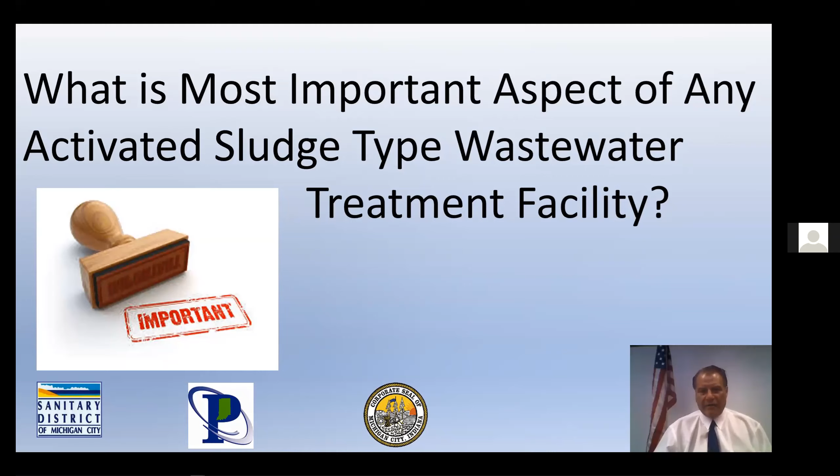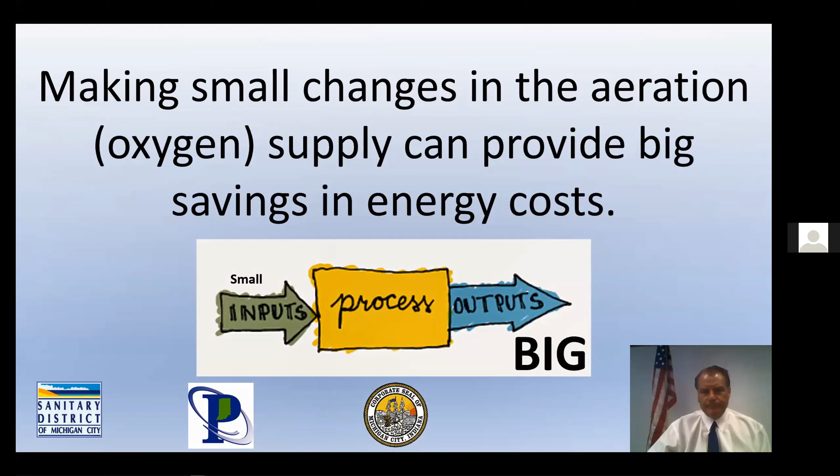But first we must ask, what is the most important aspect of any activated sludge type facility? Proper and adequate aeration. Making small changes in the aeration supply can provide big savings in energy costs and huge reductions in pollution.

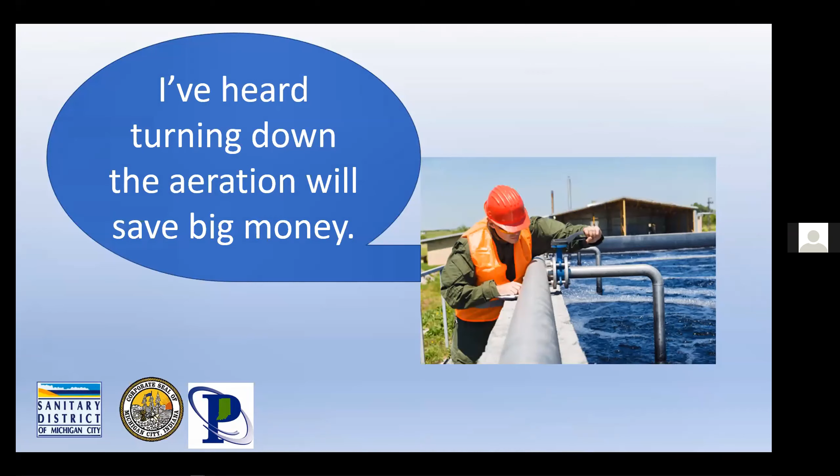Is this a simple, straightforward process? I've heard turning down the aeration will save big money. So I turned it down, way down. I should start seeing savings soon. After I save all this money, maybe I'll get a raise.

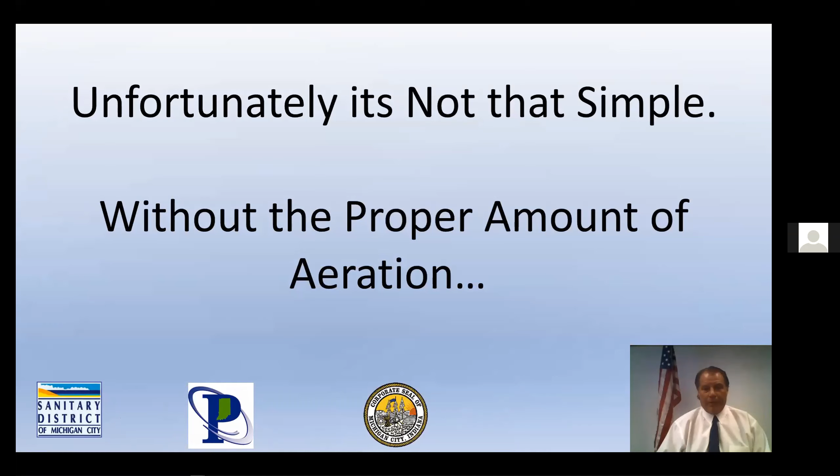Unfortunately, it's not that simple. Without the proper amount of aeration, this is Mr. Big. Mr. Collins often talks about Mr. Big when he gives his presentations at the Pollution Prevention Conference each year. And as Mr. Collins will remind you, Mr. Big will not be happy with you if you turn down the air too much in your aeration tanks.

You will be receiving a call from Mr. Big, and he will be saying to you, 'Hey, Michael, what do you know about these permit limit violations?' I don't think anyone wants to receive that call from Mr. Big.

And without the proper aeration, the overall objective of treating the wastewater will be compromised, polluted water will be discharged to the receiving stream, and violations of the environmental rules will occur. And you can be rest assured, Mr. Big will be on the other end of the phone.

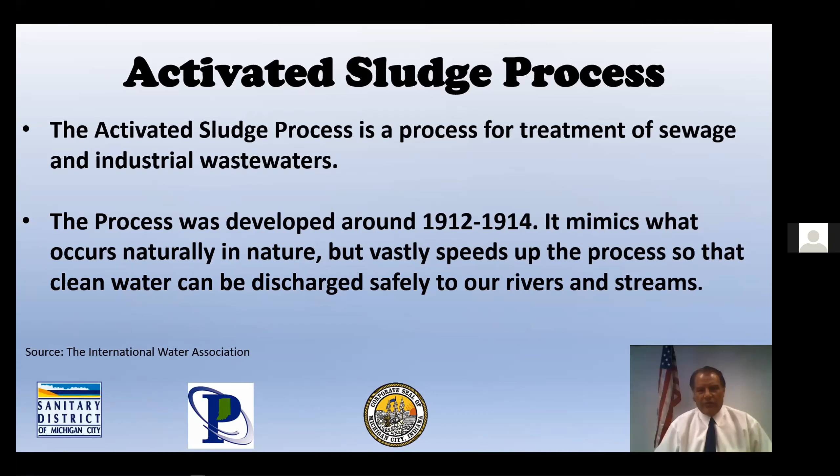Let's spend a little time to talk about the activated sludge process. The activated sludge process is a process for treating sewage and industrial wastewaters. The process was developed around 1912 to 1914. It mimics what occurs naturally in nature, but vastly speeds up the process so that clean water can be discharged safely to our rivers and streams.

There are a large variety of designs. However, in principle, all activated sludge systems consist of three main components: an aeration tank, which serves as a bioreactor; a settling tank or clarifier for separation of the activated sludge solids and the treated wastewater; and return activated sludge equipment to transfer settled activated sludge from the clarifier back to the influent of the aeration tank.

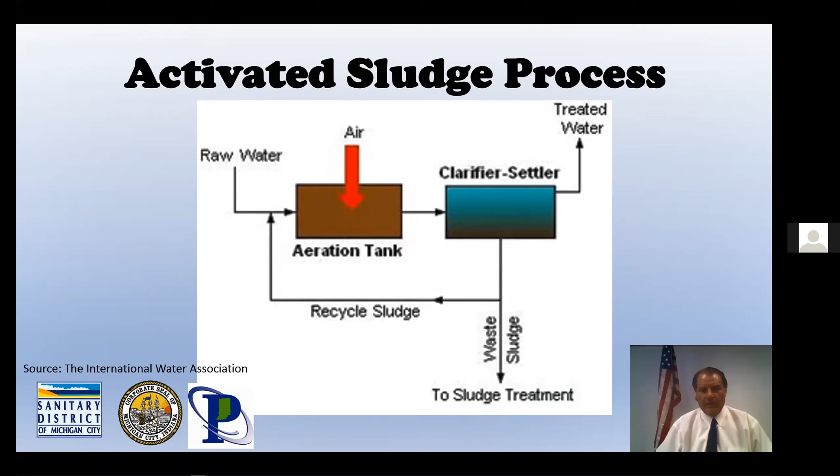The biomass mixture in the aeration tanks is commonly known as mixed liquor. Typically, the solids range between 2,500 and 6,000 milligrams per liter in these tanks, and you want to maintain a dissolved oxygen level of at least 1 to 2 milligrams per liter at the end of the tank to achieve adequate treatment.

Efficiency is controlled by your detention time in the tank and other factors like your loading of BOD and nitrogen. That's called your food to mass ratio, or food to microorganism ratio. And of course, your oxygen supply.

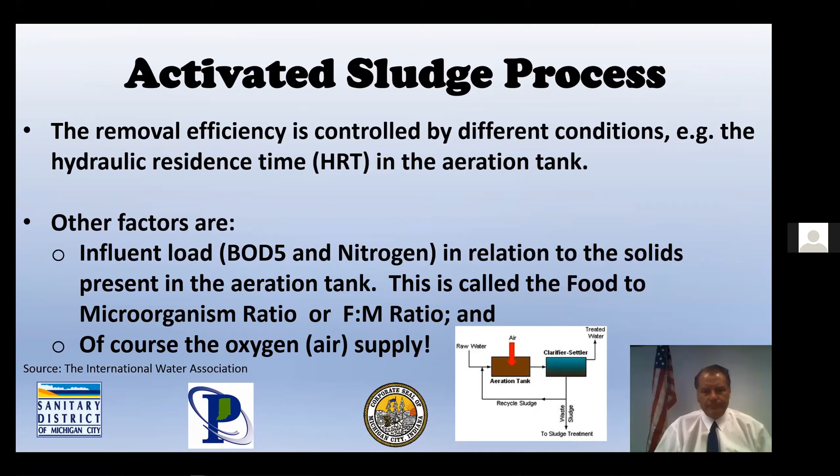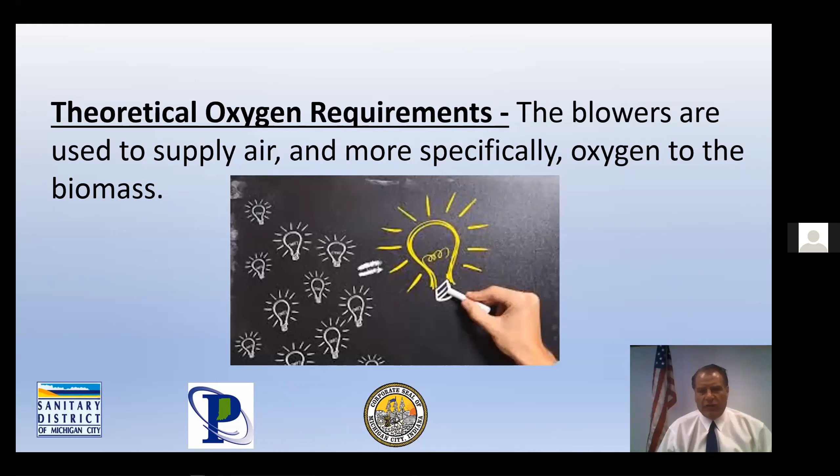But how much air is needed to treat the wastewater? Let's take a look at the theoretical oxygen requirements. The blowers are used to supply air, but more specifically oxygen, to the biomass. The theoretical amount of oxygen required can be calculated using the flow, BOD, and ammonia loadings.

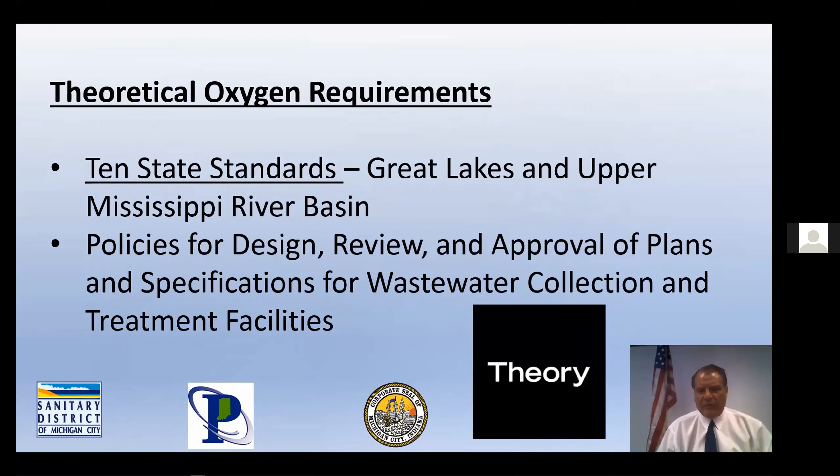The theoretical oxygen requirements are contained in the 10 state standards. It's a policy for design, review, and approval of plans and specifications for wastewater collection and treatment facilities.

The theoretical oxygen requirements are contained in section 92.331, and they state that 1.1 pounds of oxygen are needed for every pound of BOD treated, and 4.6 pounds of oxygen are needed for every pound of ammonia treated.

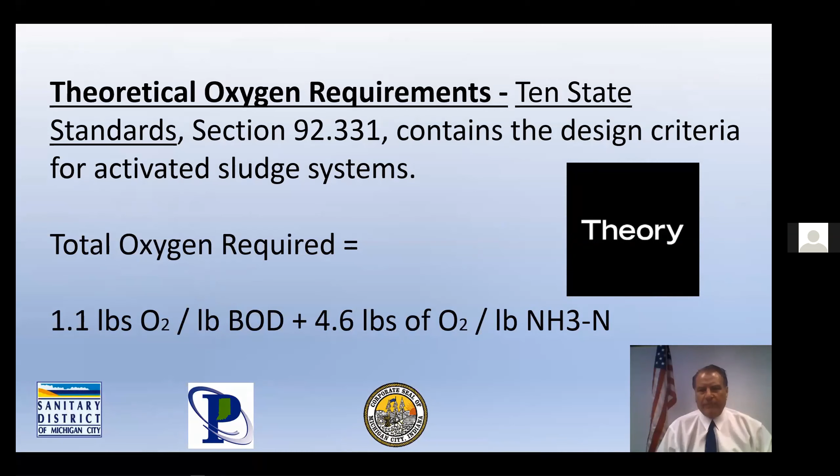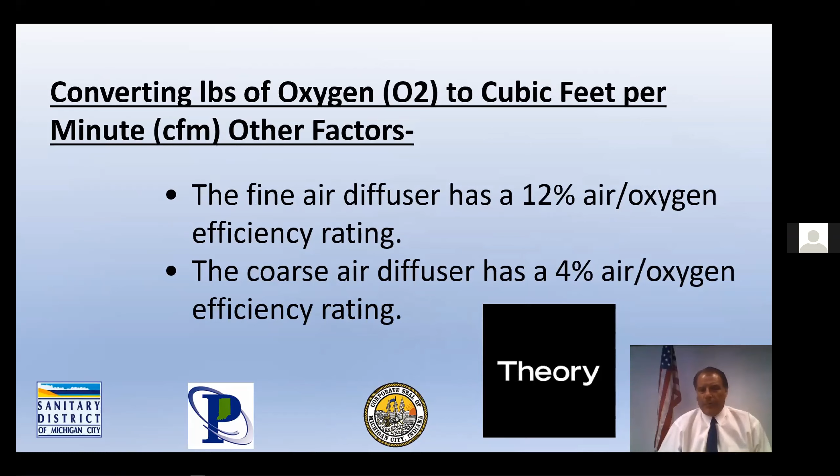Air contains 21% oxygen. 1 cubic foot of air equals 0.075 pounds, and there are 1,440 minutes in a day. A fine air diffuser has an efficiency rating of about 12%, and a coarse air diffuser has a 4% air efficiency rating.

Why does fine air have such a higher oxygen transfer and efficiency rating than coarse air diffusion? Surface area of the bubbles, of course. Hundreds and thousands of small bubbles have more surface area than a few large bubbles. The more surface area, the more oxygen transfer with the organisms, and the more efficient the process.

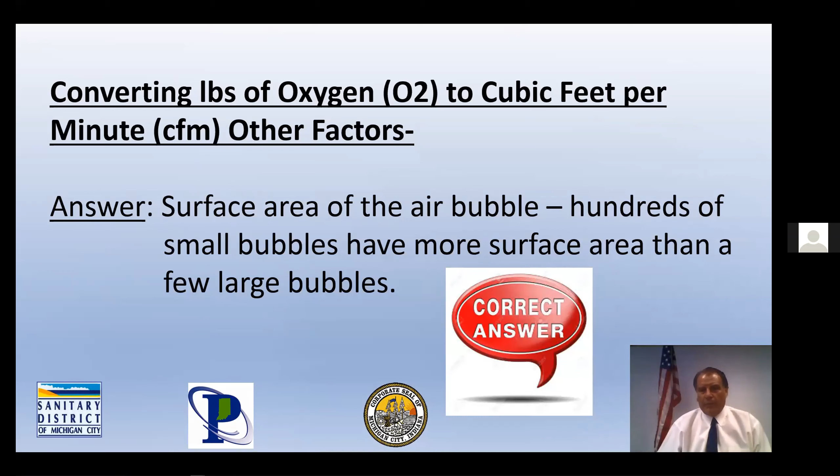Other more detailed information such as temperature, depth of water over the diffuser, humidity, and barometric pressure can also be used to refine these calculations.

Let's look at an example. Our example wastewater treatment facility will have an average daily flow of 12 million gallons per day, an average BOD loading of 200 milligrams per liter, and an average ammonia loading of 20 milligrams per liter.

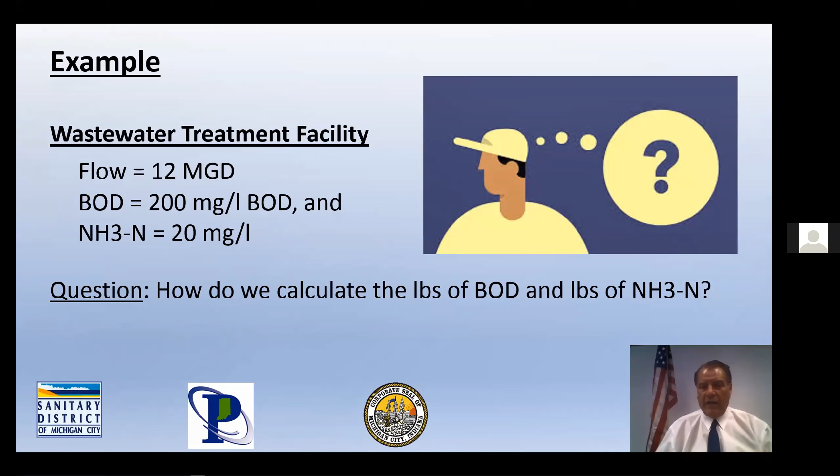How do we calculate the daily pounds of BOD and ammonia? We calculate these pounds by taking the flow in million gallons per day times the concentration in milligrams per liter times a conversion factor of 8.34.

So looking at our example, we have the pounds of BOD is 12 million gallons per day times 200 milligrams per liter times our factor of 8.34, and we end up with 20,016 pounds of BOD per day. For nitrogen, we use the same calculation and we end up with 2,002 pounds of nitrogen per day.

And the amount of oxygen that we need is 1.1 times the 20,016 plus 4.6 times the 2,002, and that equates to 31,225 pounds of oxygen we need every day. So as you can see, we need a lot of oxygen to treat this wastewater for 12 million gallons of flow. Remember, 1.1 pounds of oxygen is needed to treat the BOD, 4.6 pounds of oxygen is needed to treat the ammonia.

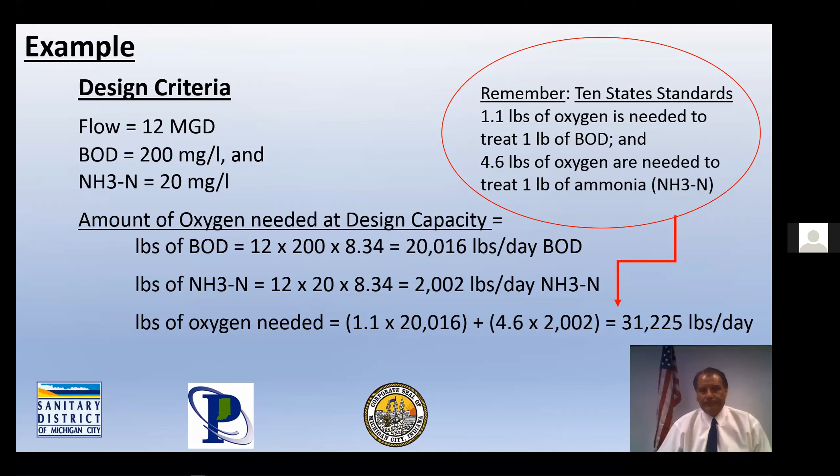So our wastewater treatment facility needs 31,225 pounds per day of oxygen. How do we calculate how much air we need?

To determine how much air we need for the day, we take our 31,225 pounds per day requirement of oxygen and we divide that by 0.21, because remember, air contains 21% oxygen. This means we need 148,690 pounds of air to treat our wastewater.

And to put that in cubic feet per day, we divide that by the factor of 0.075, because 1 cubic foot of air weighs 0.075 pounds, which yields us 1,982,537 cubic feet of air needed each day to treat our wastewater.

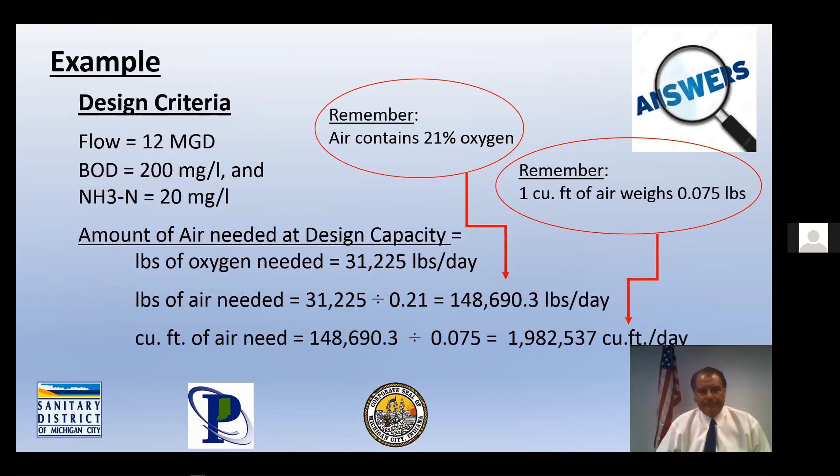Let's remember, the coarse aeration has a 4% efficiency transfer rating, and the fine aeration has a 12% efficiency transfer rating. Using these factors and our 1,982,537 cubic feet per day, we can calculate that we need 34,419 cubic feet per minute of air if we use coarse diffusers.

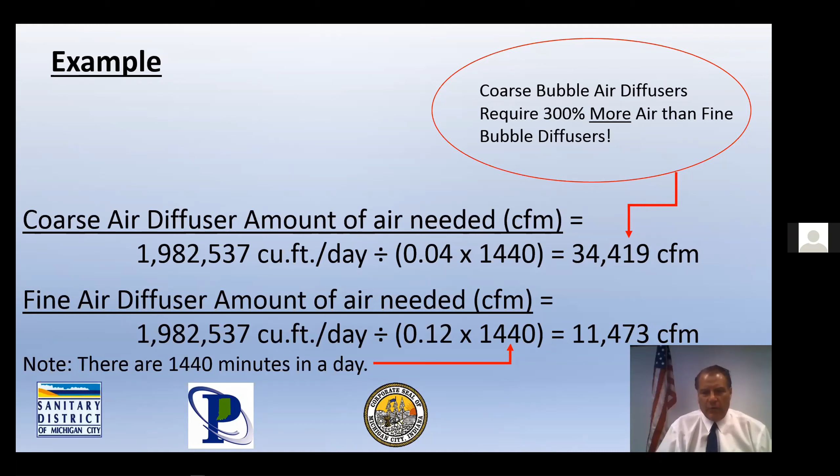Using a fine diffuser, we can calculate that we need 11,473 cubic feet per minute. As you can see, the fine aeration diffuser is 300% more efficient, or the coarse aerator uses 300% more air than the fine air. And if you have coarse aeration in your facility, that's a significant waste of energy, and you should be changing it out to fine aeration diffusers as soon as possible. This will significantly save energy, and it will reduce air pollution at the same time.

We must also remember that the blowers used to supply air to the aeration tanks are often used to supply air to other processes in the wastewater treatment facility. In our example facility, we use 396 cubic feet per minute of air for post-aeration. Therefore, the total amount of air our blowers need to supply at design loading is 11,869 cubic feet per minute.

Let's take a minute or two to discuss the difference between actual airflow rate, or actual cubic feet per minute, and standard condition airflow rate, or standard cubic feet per minute.

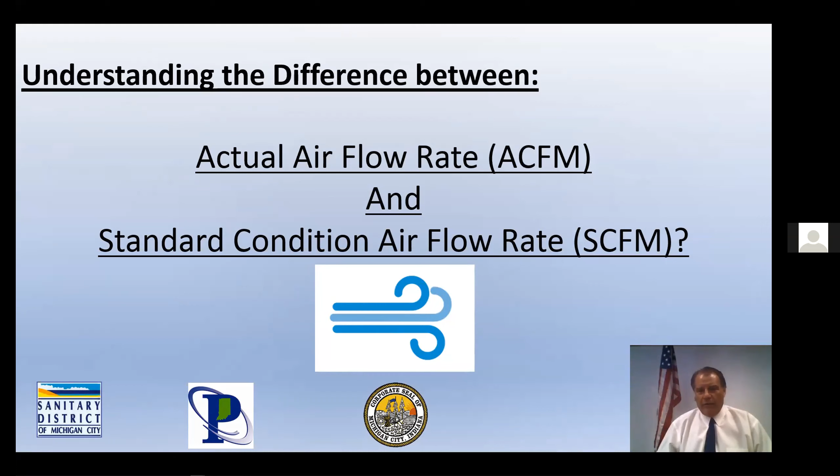We all remember from school the ideal gas law. It starts out with Boyle's law, which states the pressure of a gas is inversely proportional to its volume. Robert Boyle noticed that when the volume of a container holding a gas is increased, the pressure decreases, and vice versa, provided the temperature is held constant.

And Charles' law states a volume of gas is directly proportional to its temperature. Scientist Jacques Charles noticed that if air in a balloon is heated, the balloon expands.

Mathematically, we can combine Boyle's law and Charles' law into pressure times volume divided by temperature equals a constant. The ideal gas law combines these relationships between pressure, volume, temperature, and mass, and gives us a number for the constant. The ideal gas law is PV equals nRT, where n is the number of moles and R is the universal gas constant. The value of R depends on the units involved, but it is usually stated with SI units as R equals 8.314 joules per mole per degree Kelvin.

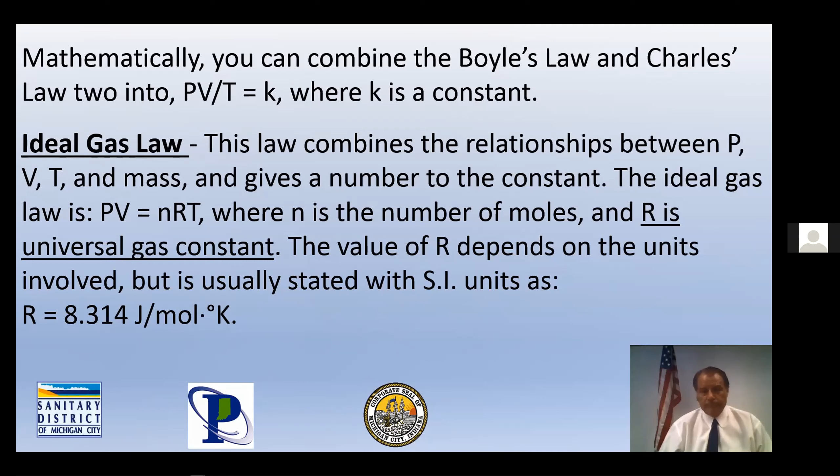Actual cubic feet per minute, ACFM, is a unit of flow rate. It is commonly used by manufacturers of blowers and compressors. It's the actual air that is delivered. Standard cubic feet per minute is a volumetric rate that is corrected to standard conditions.

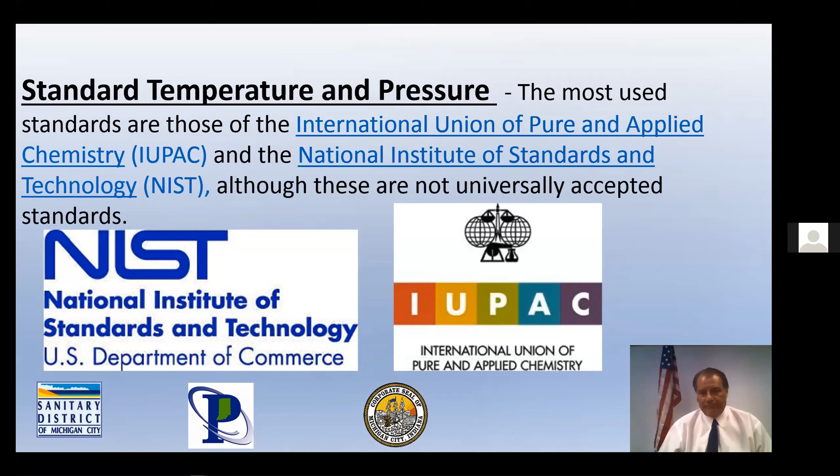But here's the tricky part: the standard conditions may vary depending on the standard used. The International Union of Pure and Applied Chemistry and the National Institute of Standards and Technology have different standards. To make matters worse, the IUPAC actually changed their standard definition. Until 1982, they used 0 degrees Celsius and 1 atmosphere. However, after 1982, they started using 10 to the 5th pascals, or 1 bar, instead of 1 atmosphere.

And NIST uses a temperature of 20 degrees Celsius, 293.15 Kelvin, or 68 degrees Fahrenheit, and an absolute pressure of 1 atmosphere. International Standard Metric Conditions are also provided here.

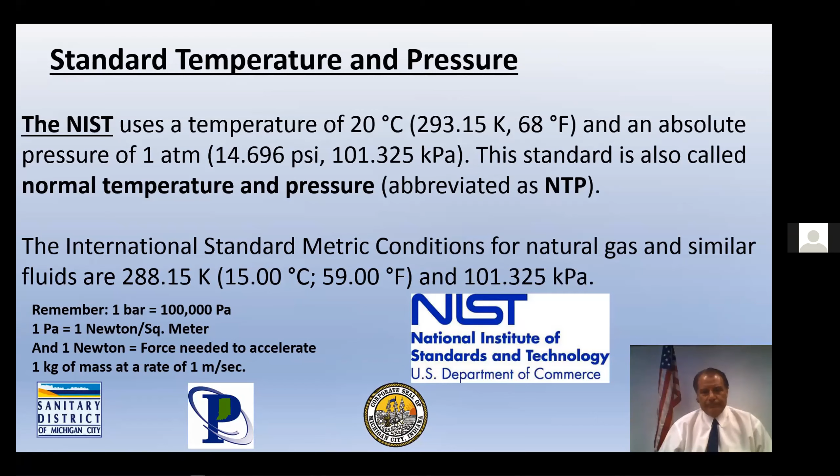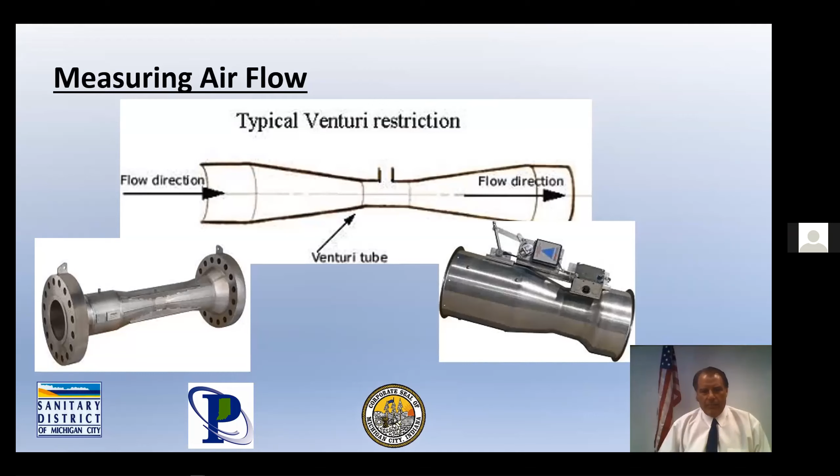How do we measure airflow? This is typically done through a venturi, or a restriction in a tube. The top is just a basic drawing showing air flows in, there's a restriction, and then the air flows out. What you do is measure the pressure differential across the restriction. There's some pictures of a couple venturis.

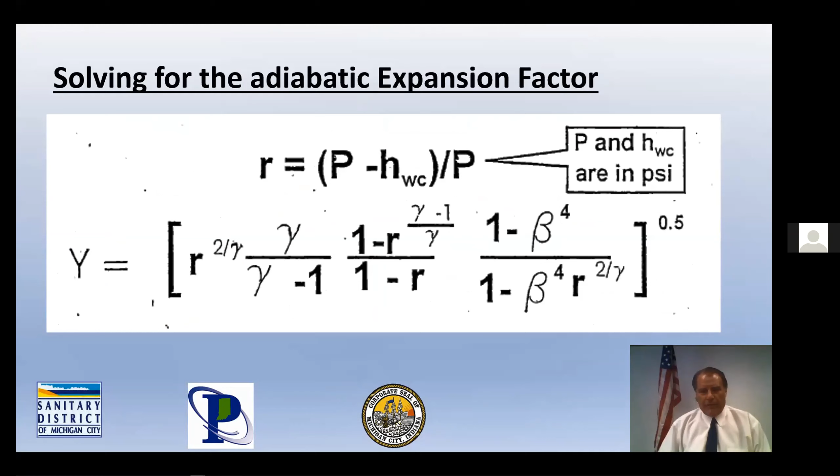And here's the calculation for calculating the flow rate through a venturi. One of the factors is this Y factor, the adiabatic expansion factor. We'll take a look at that equation in and of itself—some simple math. If there are any mathematicians here at the conference, we'll be glad to look at that. But what you do is have your manufacturer print out a table that provides you with the actual flow rate and your pressure differentials.

While it is important to understand the difference between actual flow and standard flow, we will stick to cubic feet per minute for this presentation, and I will let you calculate your actual flow at your own facility. We will also elaborate more on the venturi flow rate calculation in a sequel to this presentation.

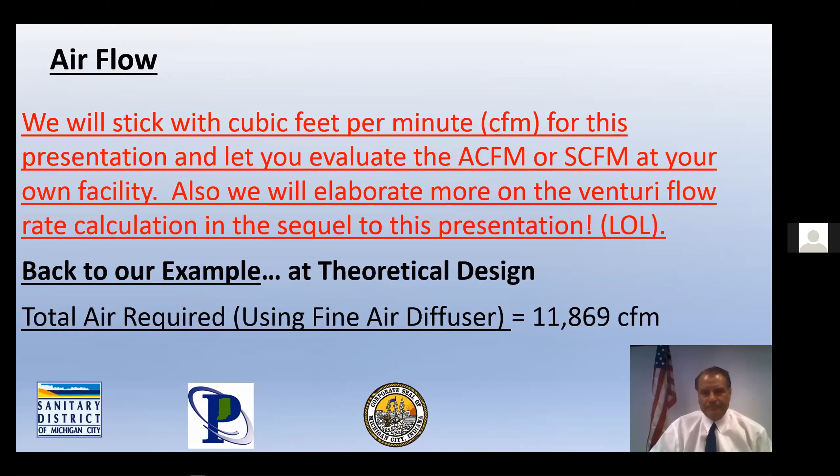Back to our example. At theoretical design, the total air required using a fine air diffuser is 11,869 cubic feet per minute. Remember, the total cubic feet per minute includes the amount of air needed for post-aeration.

At our example facility, there are 6 blowers, labeled blowers 1 through 6. Here they are on a table, with their capacity per minute. We have 2 blowers that can discharge 3,700 cubic feet per minute, one that can discharge 1,840 cubic feet per minute, one that can discharge 1,140 cubic feet per minute, and 2 that can discharge 2,300 cubic feet per minute.

So we have a current total capacity of 14,980 cubic feet per minute, and a firm aeration capacity, we'll talk a little more about that, of 11,280 cubic feet per minute.

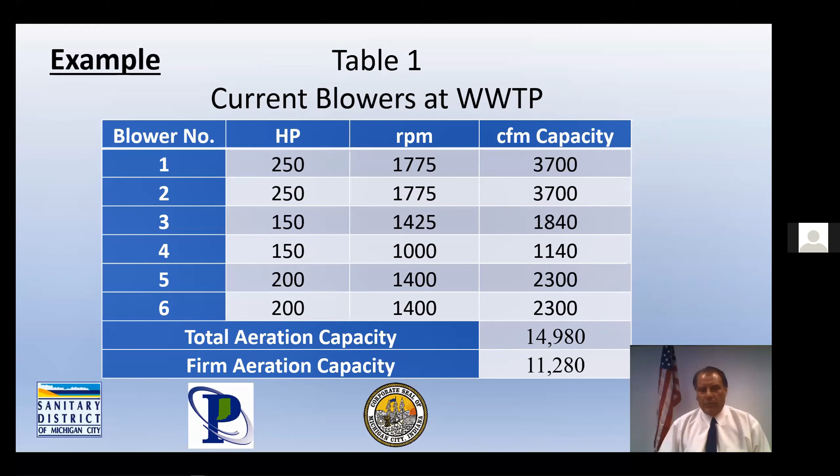Firm aeration capacity is defined as the capacity available with the largest unit out of service. Think about this. If you're designing a wastewater treatment facility or a lift station, you need to have redundancy. The redundancy needed is based on whether, with the largest pump out of service, or in this case the largest blower out of service, or largest treatment unit out of service, you can still meet the design criteria of the facility.

So here we have a situation where at our example wastewater treatment facility, when we take off the largest blower, which was 3,700 cubic feet per minute, we end up with 11,280 cubic feet per minute of firm aeration capacity. Does our example facility have enough firm aeration capacity? Yes or no?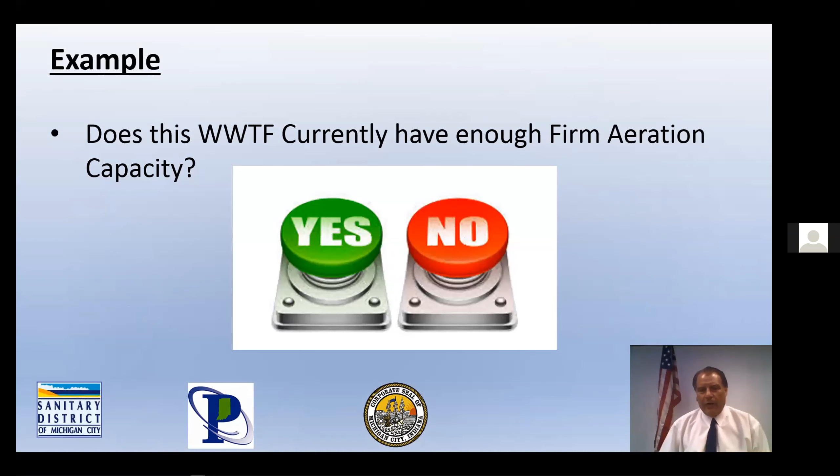The answer is no. The total air required, again, was 11,869 cubic feet per minute, but our firm aeration capacity is only 11,280 cubic feet per minute.

Here's a little tip for any IDEM wastewater treatment inspectors listening in to this presentation. It's something you should check when you inspect wastewater treatment facilities: make sure that if their largest aerator is out of service, they still have enough firm capacity to treat their design load.

Most wastewater treatment facilities rely on fine bubble air diffusion for both the necessary oxygen treatment and the necessary air for mixing. Please understand that in the aeration system, it must be well mixed. It's not a matter of just entering this air in one little spot or two little spots within the aeration tank. It has to be well mixed throughout the tank so that proper oxygen transfer occurs and the microbes can feed off of this air.

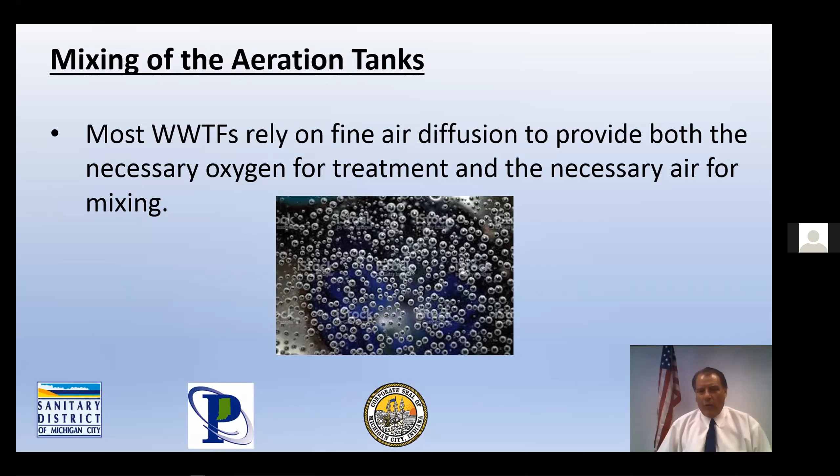Adequate mixing is very important. The manufacturer of the fine aeration diffuser system at our example facility recommends 0.12 cubic feet per minute of air for every square foot of aeration surface area. The surface area of the aeration tanks at our example facility is 36,000 square feet.

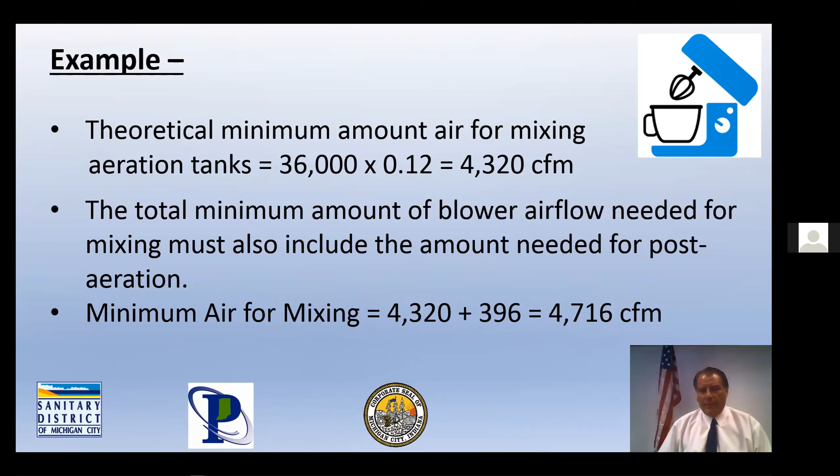Multiplying 36,000 times 0.12, we get a factor of 4,320 cubic feet per minute. The total minimum blower airflow needed for proper mixing is then 4,320 cubic feet per minute, plus let's not forget our 396 cubic feet per minute needed for post-aeration. So for our example facility to have enough air for proper mixing, we need 4,716 cubic feet per minute.

Is the air required for treatment at average design loading enough to provide adequate mixing? Yes or no?

Yes. The air needed for design is 11,869 cubic feet per minute, and the air needed for mixing is 4,716. So it can be seen that if we have the design airflow going through our aeration tanks, we have more than enough for adequate mixing. At design, that's the key, at design.

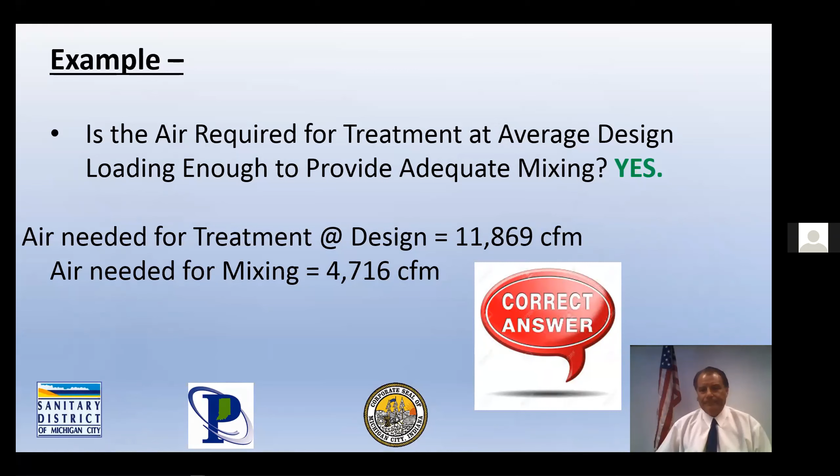Why is proper mixing so important? The last thing any certified operator of an activated sludge treatment facility needs is undesirable organisms, such as filamentous and Nocardia.

These organisms can cause severe operational difficulties that will lead to violations of the NPDES permit and long-term operational difficulties.

And let's not forget a call from Mr. Big.

Many of these undesirable organisms thrive in low DO conditions that can be present in poorly mixed portions of the aeration tanks where the DO will be lower. I cannot stress this point enough. You do not want to have an inoculation of your treatment facility with Nocardia or filamentous organisms. Actually, Nocardia is a type of filamentous. You do not want to have this in your facility. You will battle this for months, maybe even years, in order to rid your facility of this problem. This is why adequate mixing is so important.

Here's some pictures of what filamentous bacteria looks like. It's like a hair-like substance that really slows down your settling. And when you get the Nocardia, it'll make a foam in your aeration tanks, and it will cover your aeration tanks, and you will be upset for sure.

And it will likely lead to permit limit violations and ultimately a call from Mr. Big, Mr. Collins' friend, Mr. Big. The call you do not want to receive.

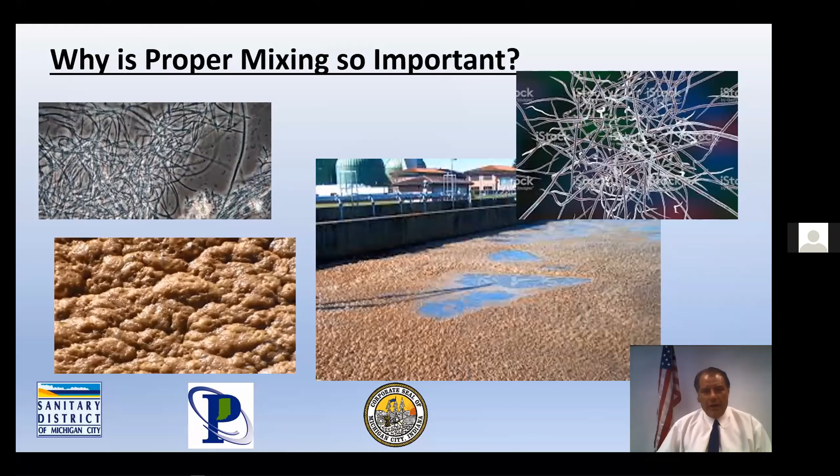Next, we will look at the actual loadings to the wastewater treatment facility. We looked at the average data for a 3-year period of our hypothetical wastewater treatment facility located in Michigan City, Indiana. The flow for the 3-year period on average was 6.8 million gallons per day. The average BOD loading was 75.27 milligrams per liter, and the average ammonia loading was 14.32 milligrams per liter.

Using this criteria, we calculate that the average loading per day was 4,269 pounds of BOD, 812 pounds per day of ammonia, and the oxygen needed using the Ten States Standards of 1.1 pound of oxygen for every pound of BOD and 4.6 pounds of oxygen for every pound of ammonia calculates to 8,431 pounds per day of oxygen are needed to treat the average flow at our hypothetical wastewater treatment facility.

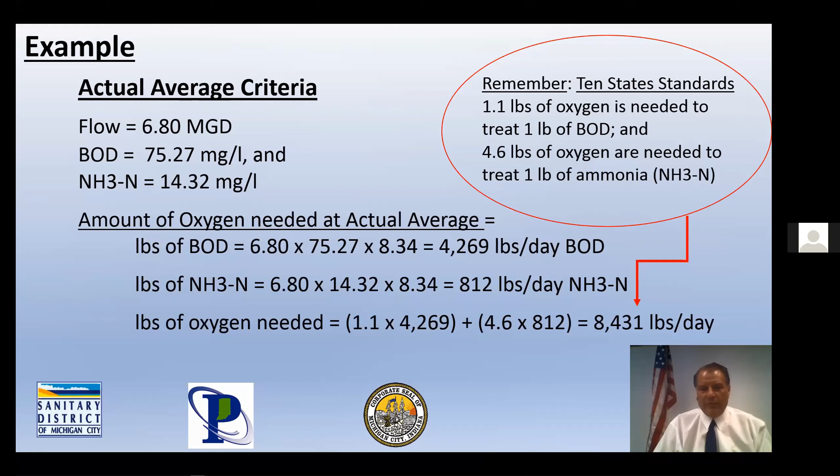The amount of air that is needed, we take this 8,431 pounds per day and divide that by 21%, which is the amount of oxygen in the air. That yields us 40,149 pounds per day of air is needed. And using 1 cubic foot of air weighing 0.075 pounds, we could see that we need 535,322 cubic feet per day of air. And you might remember that compares to the 1,900,000 cubic feet of air that we needed at the design criteria.

For fine air diffusion, taking the 535,322 cubic feet of air and the fine air efficiency rating of 12% and the number of minutes in a day, we can calculate that we need 3,098 cubic feet per minute of air for our wastewater treatment facility. We need to add the 396 cubic feet per minute that we need for post-aeration. So on average, to treat the average daily load at our wastewater treatment facility, we need 3,494 cubic feet per minute of air.

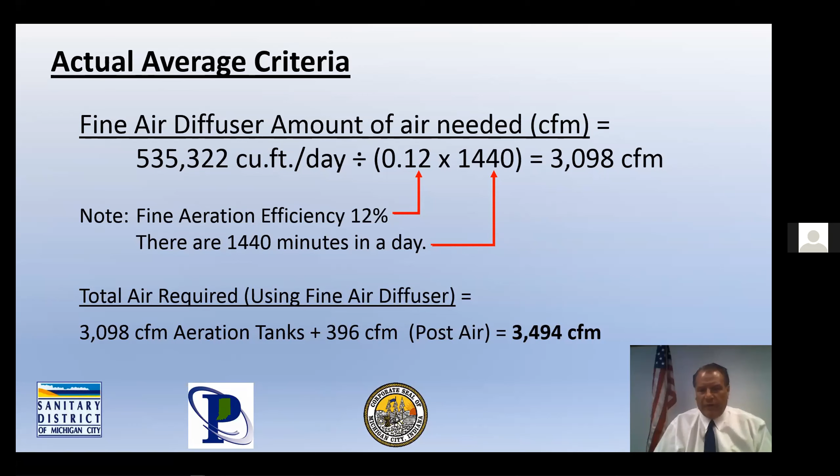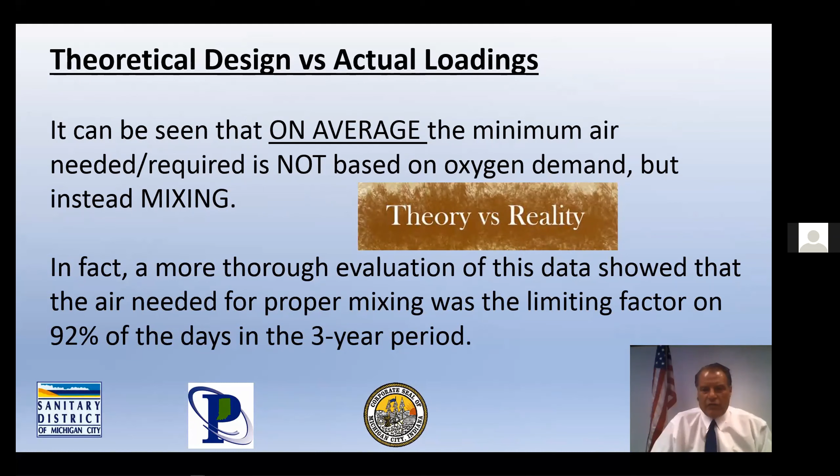Remember, we need 4,716 cubic feet per minute of air to meet the minimum mixing requirements. It can be seen that on average, the minimum amount of air needed or required is not based on the oxygen demand or the loading to the treatment facility, but instead on the amount of air that is needed for mixing. A further study of this data showed that on 92% of the days in the 3-year period, the wastewater treatment facility was limited by mixing and not by the amount of air that was needed to treat the average daily load.

Now we need to think about daily and intraday fluctuations. What is the day with the highest loading? Dissolved oxygen sags and heavy loading occurs routinely. Typically, the wastewater treatment facility will see high dissolved oxygen demand for several hours a day and low dissolved oxygen demand for extended periods of time. There's a diurnal effect in your wastewater treatment facilities, especially your municipal facilities. You will have a time of the day when you're going to get your peak loads.

Your flows will increase and your loadings will increase. At our facility, this usually happens in the afternoon, between noon and 7 p.m. That's typically when our loads will increase and our aeration system will need more air. Therefore, on average, the wastewater treatment facility might be limited by mixing, but for several hours a day, more oxygen or air might be necessary to keep the aeration tanks from going septic.

When choosing a new blower, you need to make sure that it has enough capacity to meet your peak demand when your heavy loads come in during the middle of the day. And you also want to make sure it has a wide operating range so that it can be turned down when the demand is low.

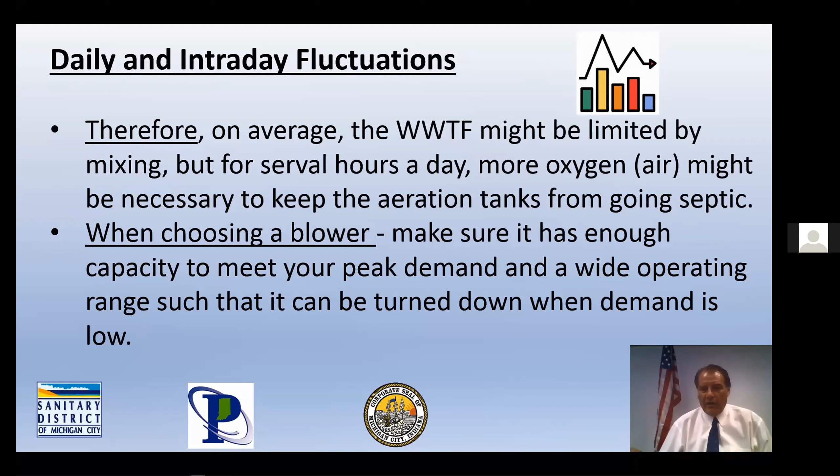The old school method was constant airflow at design or worst case scenario. The new technology: many wastewater treatment facilities now use DO meters in the aeration tanks to control and regulate the airflow to the aeration process. These meters are typically connected to the blowers and sometimes to valves to increase or decrease the airflow as necessary to the aeration tanks or to certain aeration tanks.

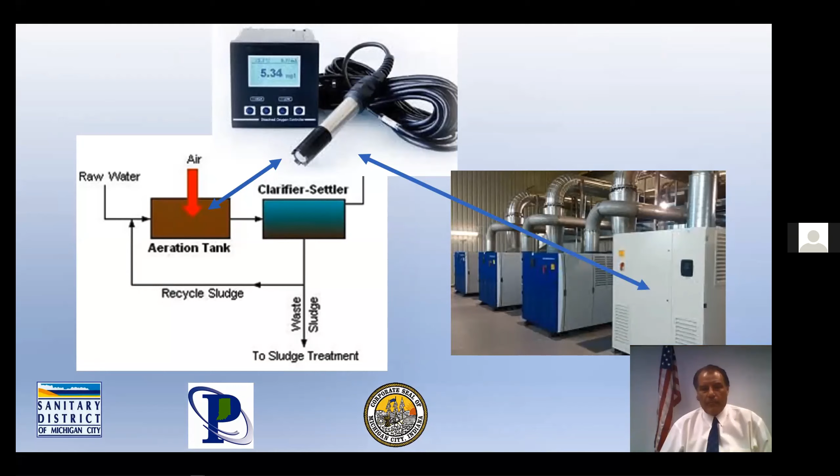There's a picture that shows the activated sludge process again with the DO meter measuring the DO in the aeration tank, sending the signal back to the blowers. As the DO starts to drop in your aeration tanks, the airflow of your blowers will need to increase. As the DO in your aeration tank rises, the airflow from your blowers can be turned down.

Is there another way to accomplish this control, but still achieve proper mixing? Yes or no? The answer is a definite yes.

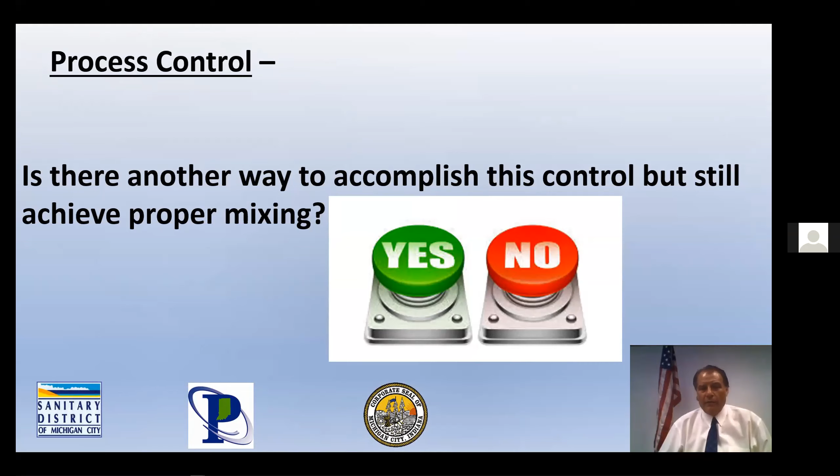You can install mechanical mixers. Using mechanical mixers in the aeration tank, proper mixing can be achieved, and the blowers can operate at a lower speed, using less energy, because you will not have to worry about having that minimum amount of air for mixing, since your mechanical mixer will provide the necessary mixing.

But of course, in any evaluation like this, you need to evaluate the cost of the mixers, the energy usage of the mixers, and the required maintenance of the mixers must all be factored into the decision to use mechanical mixers. You'll typically find they will use less energy. The cost is usually quite high, and your maintenance, you don't want to have to be pulling those out every couple of years and buying new ones. So that's what you need to look at if you want to look at mechanical mixing.

One other point about changing your blowers from old positive displacement blowers to new turbine blowers are the occupational health and safety benefits. These new turbine blowers are so quiet, they're really quite amazing. You could stand right next to them and have a conversation at normal voice level, where the old positive displacement blowers, if you're standing next to those when they're running, it's so loud you can hardly hear yourself think.

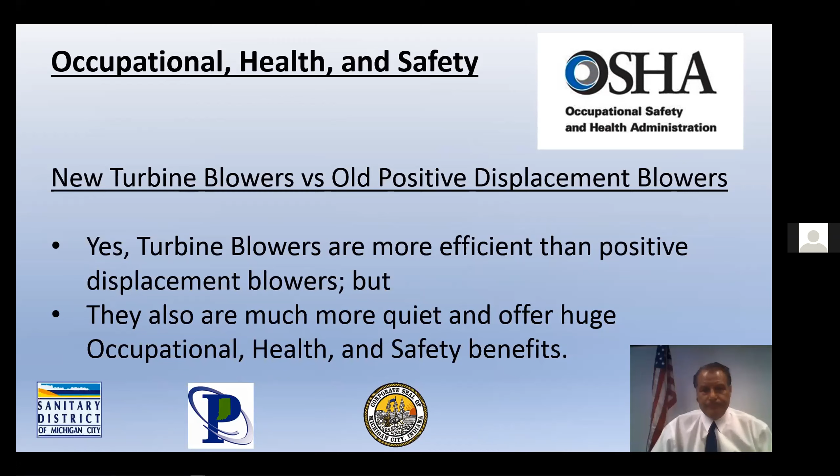Now let's talk about energy savings and pollution prevention. Based on actual operations, not design, the current positive displacement blowers of our mythical hypothetical wastewater treatment facility use 277.5 kVA or kilowatt hours. The proposed turbine blowers that we are considering installing will use only 179.6 kilowatt hours to produce the same amount of air needed for the treatment facility. How much energy will be saved, and what are the pollution prevention benefits?

The utility rates we will use are $24.30 per kilowatt peak demand per month and 5.4 cents per kilowatt hour of usage.

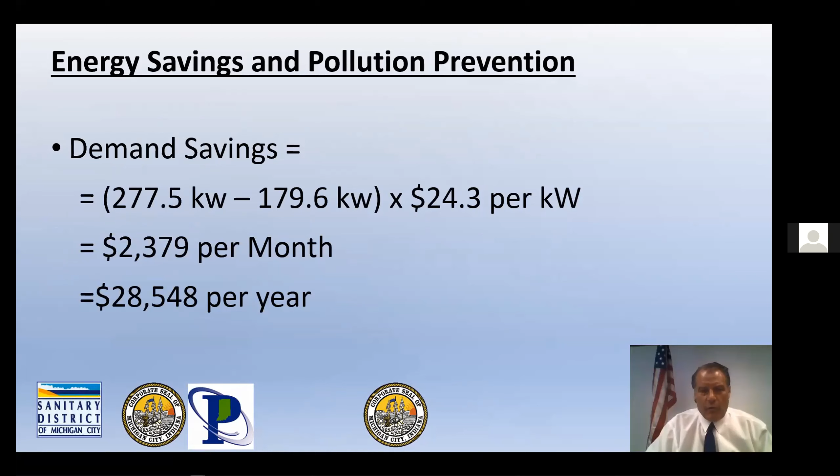To calculate the demand savings, we take the kilowatt hours of the proposed new blowers and subtract that from the kilowatt hours of the existing blowers, and multiply that by our $24.30 per kilowatt. That yields us $2,379 per month in demand savings, and multiplying that by 12 months per year yields us $28,548 per year in demand savings.

To calculate the usage savings, we take the kilowatt hours of the current system and multiply that by 8,760 hours per year. Those of you with an air permit are certainly very familiar with this 8,760 hours per year figure. That yields 2,430,900 kilowatt hours per year. The proposed usage times the 8,760 hours per year yields 1,573,296 kilowatt hours per year.

Subtracting those two numbers and multiplying the difference by 5.4 cents per kilowatt hour yields a savings of $46,311 per year.

The total energy savings is the addition of the demand savings plus the annual usage savings. $28,548 plus $46,311 yields $74,859 per year of electrical energy savings.

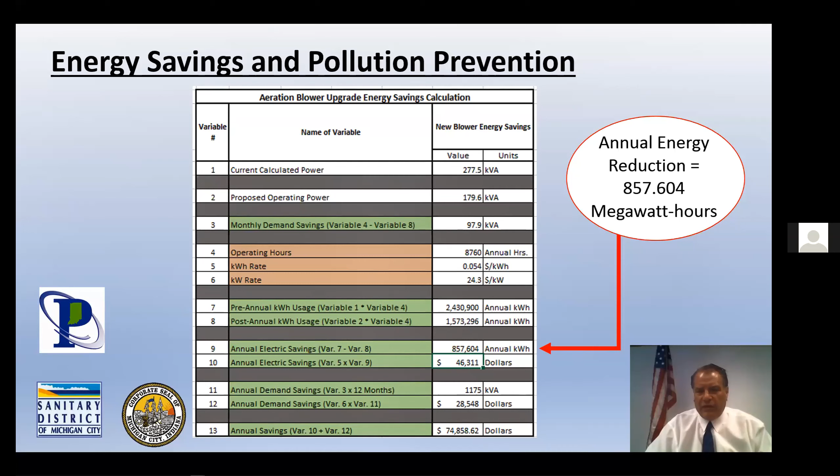As you can see, you will calculate at the bottom your savings, in this case again, $74,858. The point I want to make also about this is this shows the annual reduction in energy of 857.604 megawatt hours.

The U.S. Energy Information Administration, or the EIA, has information on Indiana's electricity profile, and for every megawatt hour it results in emissions of 3.3 pounds of sulfur dioxide, 2.1 pounds of nitrogen oxides, and 1,883 pounds of carbon dioxide.

Using the 857 megawatt hours of energy use reduction times the pollution emission factors, it is shown that the project will reduce sulfur dioxide by 2,830 pounds per year, nitrogen oxides by 1,801 pounds per year, and carbon dioxide by 1,615,000 pounds per year. So not only do these energy savings projects help out the pocketbook, they are also fantastic for the environment.

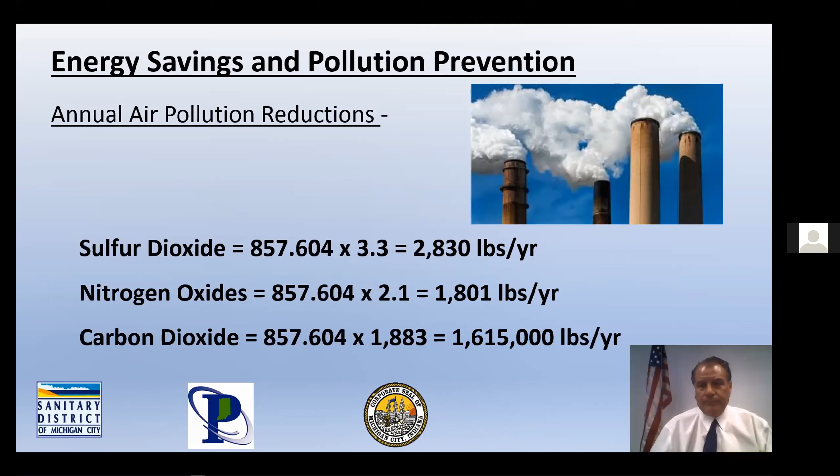I would now like to go back to last year's conference, the pollution prevention conference, and talk a little bit about partnerships. As I explained last year, partnerships are the key to environmental sustainability and pollution prevention. A partner is a person who shares or is associated with another person in some action or endeavor. Nothing depicts that better than the handshake—if you can make a handshake agreement with somebody and trust them, you know they're a true partner. In Michigan City, our partners for our energy savings project were the Energy Service Group, NIPSCO, and DLZ Engineering.

From the information presented in this presentation, it can be seen that making small changes provides big impacts. And I'm now available for any questions that anybody might have.

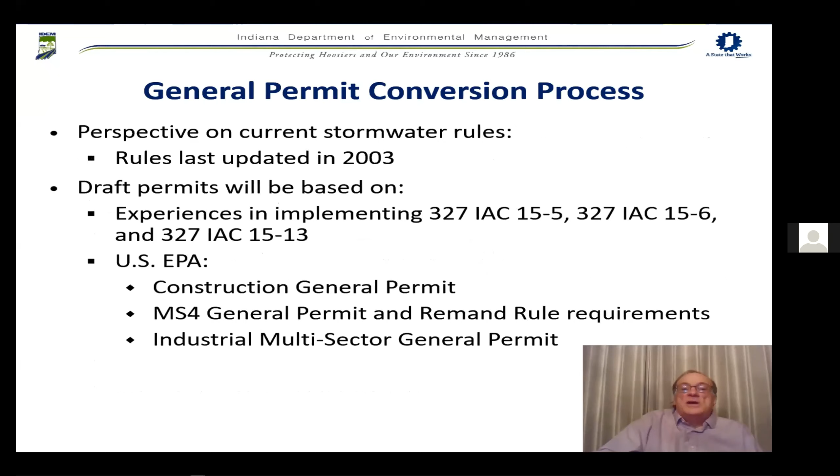Our stormwater rules were last updated in 2003. When we began the process to draft general permits, we based this on our experience implementing the three stormwater regulations, and we also took into consideration US EPA's current versions of the construction general permit, the MS4 general permit, the EPA remand rule requirements, and the industrial multi-sector general permit.

When we began the general permit conversion process, we established procedures to issue each permit. Initially, we draft a permit and submit that draft to EPA for review and comment. Once we receive comments back from EPA, we assemble an advisory group to discuss that draft permit, and as we go through the process, incorporate changes. Upon completion, we submit a final draft to EPA for final review and concurrence. Upon receiving concurrence from EPA, we public notice the final permit.

At this point in time, we have concurrence on the construction site general permit. We are getting ready to submit the MS4 general permit to EPA for final approval, and we have a draft of the industrial stormwater permit.

I'd like to begin talking about the industrial stormwater program. The program is administered under 327 IAC 15-6. Facilities that operate under specific standard industrial classification codes, or meet the narrative requirements in the rule, and also have discharges associated with a point source, are required to obtain permit coverage.

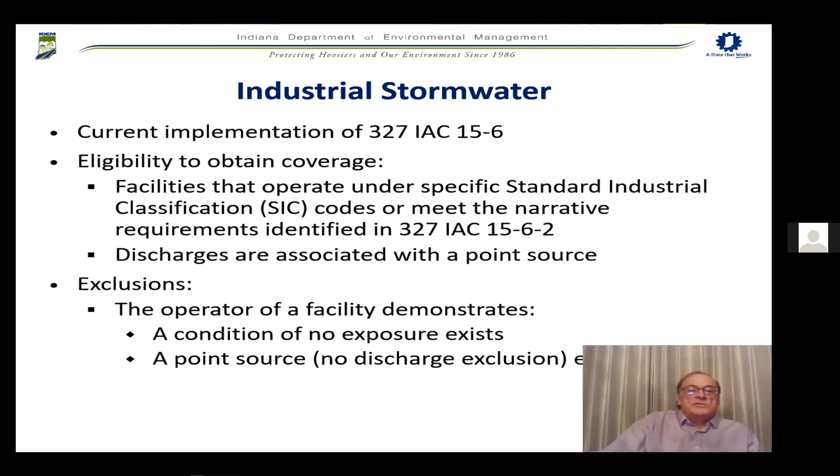There are several exclusions that appear in the rule, one being no exposure. The second is the no discharge exclusion, related to the absence of a point source. Briefly, no exposure is a certification by the operator that industrial materials and activities are protected to prevent exposure to rain, snow, snowmelt, and runoff. For the no discharge exclusion, the operator of a facility must demonstrate that runoff from the facility does not discharge through a point source.

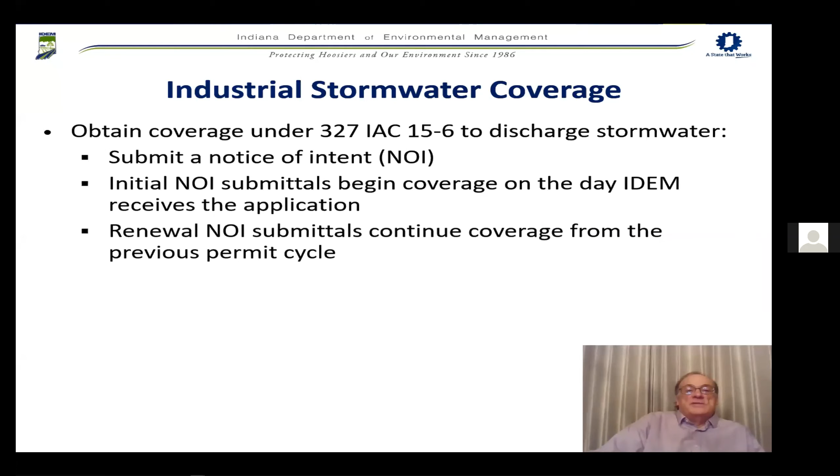If a facility meets the eligibility requirements to obtain permit coverage, the facility must submit a notice of intent. Permit coverage for an initial NOI submittal begins the day IDEM receives that application. If the facility is renewing coverage, the coverage begins from the previous permit cycle date.

In the first year of permit coverage, there are specific requirements that must be met. This first year is also an opportunity to completely evaluate and assess on-site operations and the facility. Requirements include developing and implementing a stormwater pollution prevention plan, conducting annual sampling, conducting quarterly visual monitoring, and submitting a stormwater monitoring report. This first year of sampling is an assessment tool for developing the plan, but also serves as a sampling baseline for subsequent samples taken in years 2 through 5.

You must submit a stormwater pollution prevention checklist that certifies the plan meets the requirements of the rule. In addition, an annual report must be submitted.

The stormwater pollution prevention plan must be representative of all operations and activities at the facility, including infrastructure. Its overall purpose is to identify pollutant sources, especially those exposed to stormwater. The facility operator must develop and implement practices and measures to reduce or eliminate exposure—one of the key elements in achieving compliance. Where exposure cannot be eliminated, the operator must implement treatment control measures to eliminate or reduce the discharge of pollutants. The plan is a living document, so the operator must reevaluate the effectiveness of existing preventive treatment practices and measures.

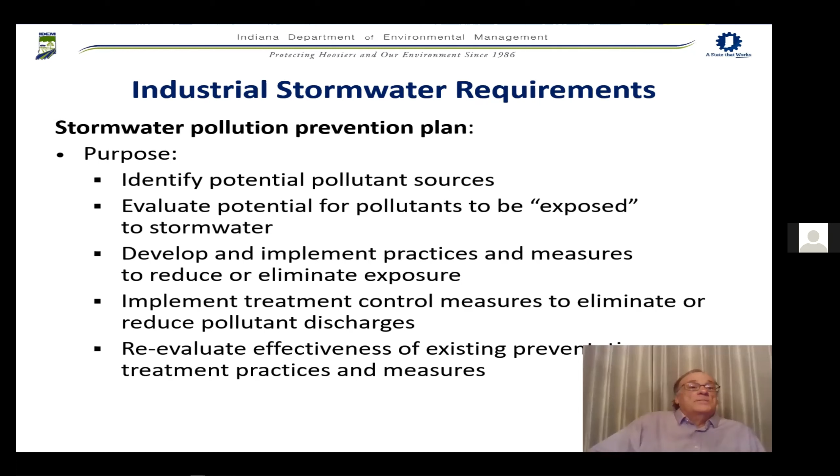After a thorough evaluation and development of the plan in the first year, the facility operator for years 2 through 5 must continue to implement the stormwater pollution prevention plan and modify it based on industrial operations and sampling. In addition, continue to conduct annual monitoring and quarterly visual monitoring. Based on sampling results and observations, make modifications to operations and/or install appropriate stormwater management measures, and finally, submit an annual report.

The monitoring program requires samples to be taken from each outfall designated on the NOI. Upon submittal of an NOI, a facility operator may claim that outfalls are similar. A similar outfall is one with similar industrial activities within the drainage area of each outfall. Samples must be collected annually.

The annual sample is based on the permit start date. For example, if a permit begins on April 15th, 2021, the first sample must be taken between April 15th, 2021 and April 14th, 2022. All samples must be from a measurable rain event of 0.1 inch or greater and at least 72 hours from the previous measurable rain event. The sample must be taken during the first 30 minutes of the discharge at the outfall.

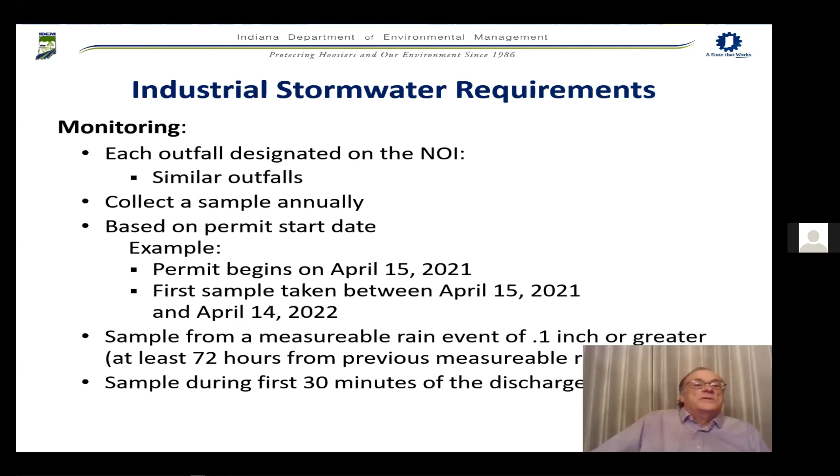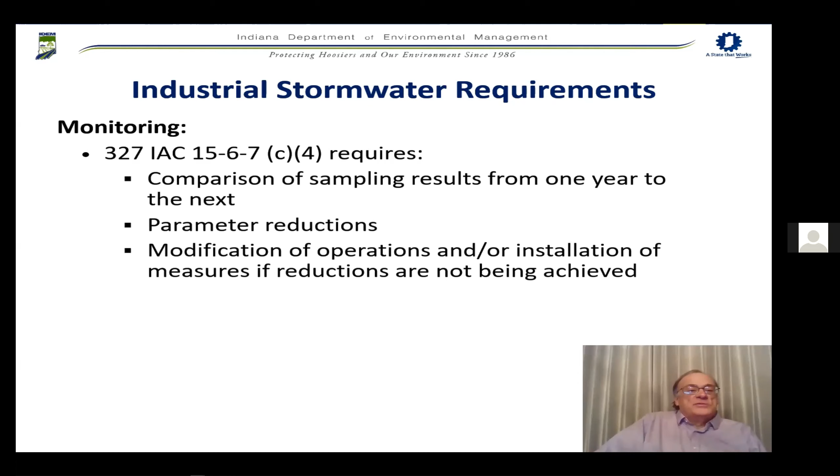The quarterly visual monitoring program and annual sampling are key elements to achieve compliance with this rule. The rule requires comparison of sampling results from one year to the next in an effort to achieve parameter reductions. If reductions are not met from year to year, the operator is required to either make modifications of their operations and/or install additional measures to meet these objectives. The rule implies continuous improvement, but does not establish reduction thresholds.

Since the rule does not establish reduction thresholds, and IDEM has been asked by permittees about this specific issue, IDEM has developed guidance of what we believe to be reasonable goals in achieving a reduction in parameters, based on US EPA benchmarks. IDEM recommends the facility operator use these benchmarks to assess management of the facility. Discharges above the benchmarks are not necessarily violations, but an indicator that operations at the facility warrant corrective action.

In addition, some of the common problems found when doing regulatory inspections are that the stormwater pollution prevention plan is out of date, the facility has failed to perform sampling and/or quarterly monitoring, there has been an unauthorized release or discharge, and that control measures are not properly operated, maintained, or installed based on sampling.

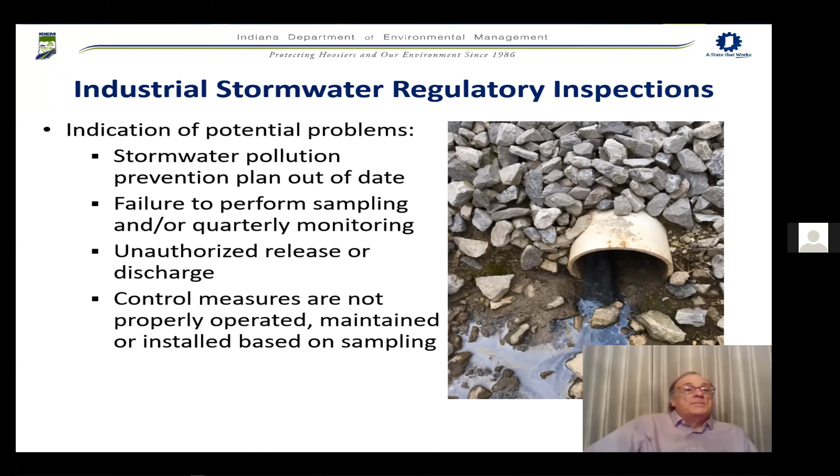Rather than take questions at this time, I will defer to Lori Gates, and we will take questions at the end of her presentation.

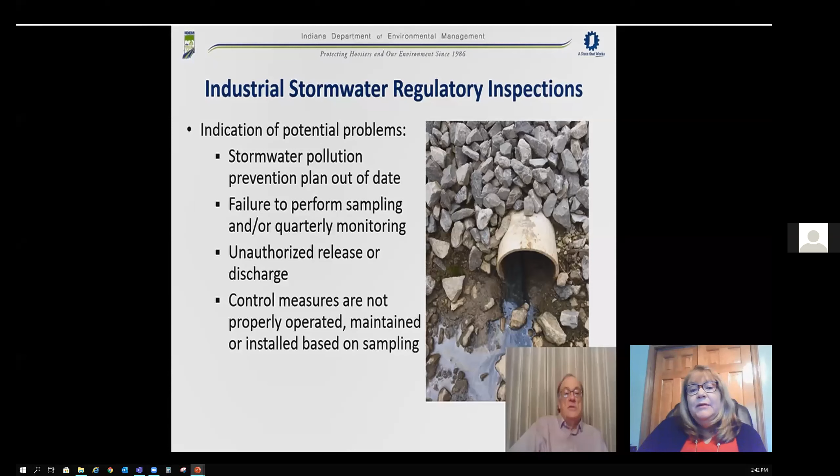So the SWPPP will have several things identified in it. Your stormwater pollution prevention team, that's a really common area where you see a lot of staff turnover, so you have to identify your team members. Now these can be identified either as an individual, a person's name certainly could appear there, or you could put a person's position. Either one, IDEM would still need to have those specific individuals' names for when they do an on-site inspection or audit of some type. Also, exposed materials that are there can also change over time.

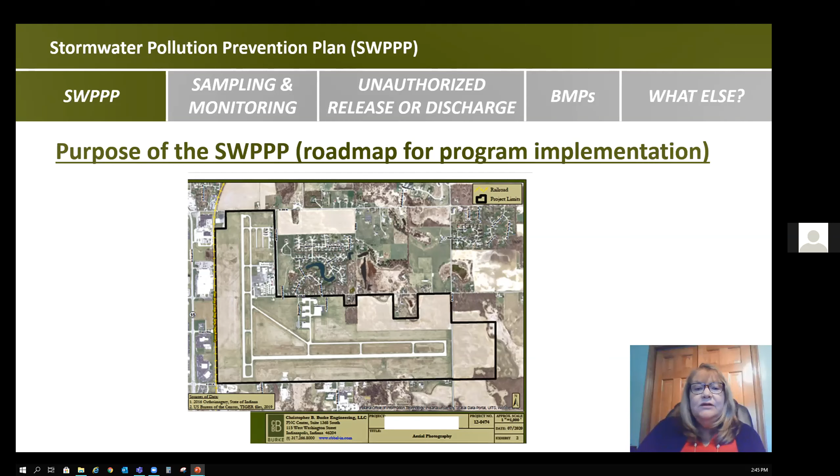Randy mentioned, and we get this question a lot about SWPPPs, like when do I need to update it exactly? People get confused. There are certain triggers, it's always a best professional judgment call, but certainly example triggers that you should use for updating the SWPPP with any additions or deletions.

The first one, any changes at the facility that you have. Facilities often undergo expansions, there could be a closure, there could be an outfall that's changed at your facility, maybe your representative overall outfall has changed.

Changes in operations, maybe some of the processes, maybe you changed how you're doing your shipping, storage, where things are stored, and different types of chemicals that are stored. Have we gone from liquid to dry product, the type of products that you use?

What about changes in staff or staff positions? Very common to happen. You could have positions listed in the SWPPP, and then a supplemental outside document where you have specific individuals' names, and maybe you can keep that updated a little easier. There's several different ways to approach this, so always be thinking outside of the box.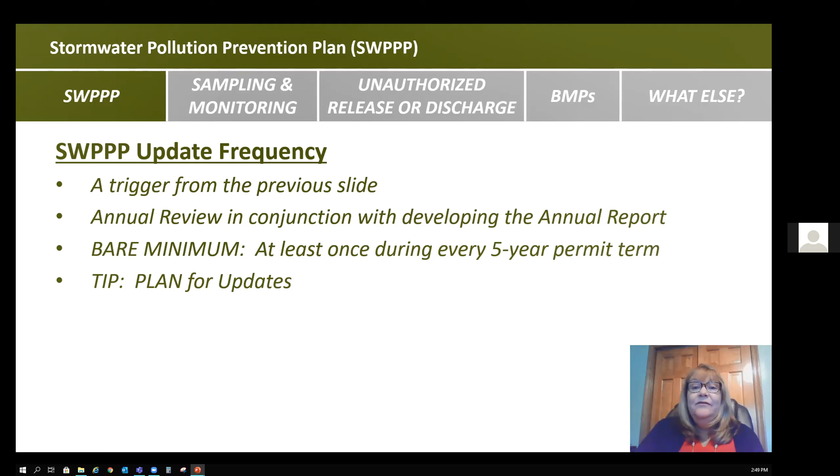Randy also mentioned failure to perform sampling and/or quarterly monitoring is an issue. So yes, we need to sample for all the parameters in Rule 6 that are specified with our annual sampling, plus whatever is reasonably expected to be in the discharge. Facilities often struggle with, well, what does that even mean, and what additional parameters do I need to come up with? You don't need to guess.

My tip is use the EPA multi-sector general permit and resources, because it will show you for your particular industrial sector what you need to monitor.

So here's an example. This is a page from the actual multi-sector general permit that EPA has. For example purposes for this presentation, I just picked the first sector of industry that appeared there. So in this case, it's the timber industry.

This is where the multi-sector general permit is a really nice tool, because EPA has taken various sectors of industry that are regulated by the permit and created specific information for that industry. So you're not trying to do the exact same thing that another type of business totally unrelated to you would do. In this example, where it comes to what do I monitor for, the multi-sector general permit tells you specifically for your industry.

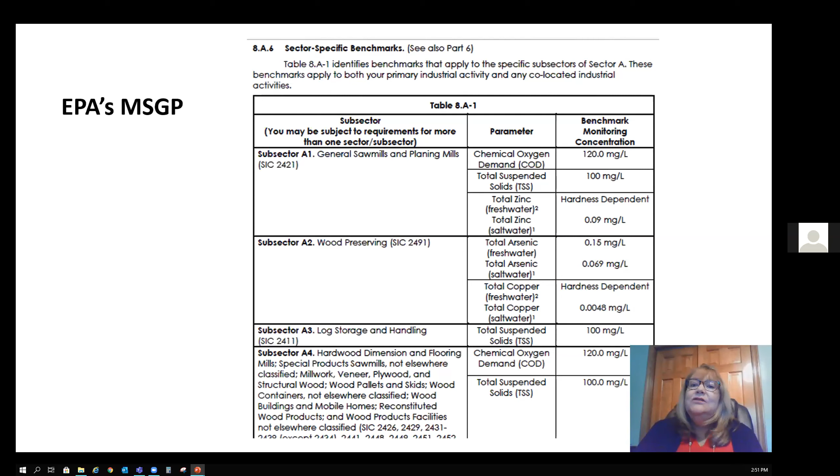Going back to these sector-specific benchmarks and also the monitoring parameters, those are all listed out in the permit. The other neat thing EPA has is a very nice series of industrial stormwater fact sheets.

Here's the one again for the timber industry, where it talks about what is the permitting program, what kind of facilities need coverage, and then it goes on to include things like what kind of pollutants are associated at my facilities.

So when we look at the multi-sector general permit example, here again you can see in the fact sheet there's a table that talks about the various pollutant sources at my facility and the potential pollutants that are there. Not saying they'll always be there, but we need to keep in mind we plan our BMPs to address these particular pollutants of concern and these particular sources.

Also, in talking about sampling and monitoring, I think we need to think about receiving water quality, because more and more in our state the TMDL program, the Total Maximum Daily Load program, is developing. For you guys that aren't familiar, IDEM does different types of monitoring. They do a 305B, and these numbers are based out of the Clean Water Act.

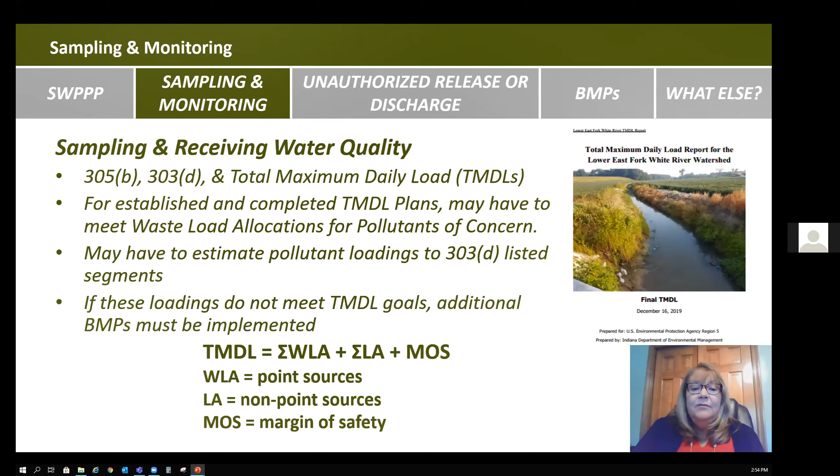Here's an equation down at the bottom for how a TMDL load is determined. You take your waste load allocation, which are your point sources. The waste load allocation includes anything that's regulated by EPA - point sources in EPA language. This would include industrial stormwater, municipal stormwater, construction stormwater, and any of the other NPDES permits could be under this. There's a load allocation, and there's also a margin of safety there.

So for the second part of what Randy discussed, the quarterly monitoring. He mentioned failure to perform quarterly monitoring was a problem. This is your visual inspection. Part of the forms IDEM has for the annual report allow you to record that you completed an inspection on a given day. However, there is no state form for actually doing this quarterly inspection.

So you need to come up with your own. You don't need to totally invent it yourself, because there are some really good examples out there. Here's an example on the slide, on the right hand side, very simple. You want to list things specific to your site, covering your grounds, inside and outside, and decide: is it okay, or do I need a corrective action?

Is there a potential problem here? And then RS means I need to revise my SWPPP, because these inspections drive how your SWPPP is revised.

Here's another example of a particular form for inspections. This is EPA's form, where you're looking at material: is it inspected, were your controls appropriate, effective, operating? And then either maintenance or corrective action is needed, along with some type of notes.

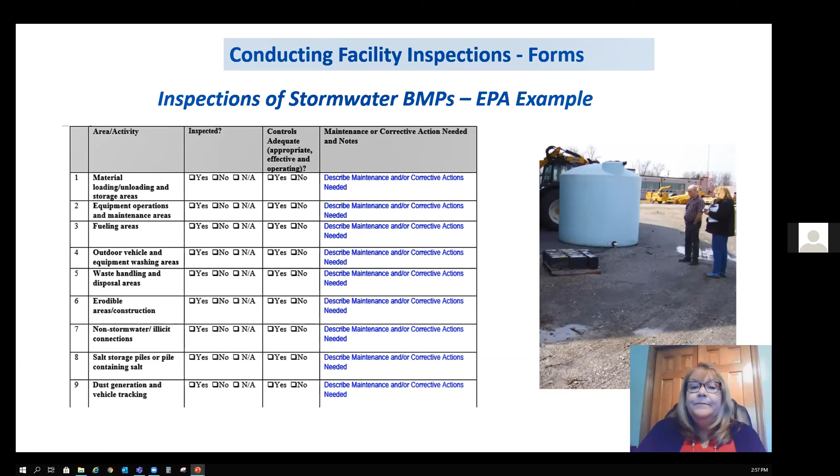Here's another example Wisconsin DNR has developed, where you look at things like color, odor, clarity, floatables, and deposits. There's another really good example of a form from the Center for Watershed Protection. So there's plenty of examples out there. Create a form that works best for you.

So a word about conducting facility inspections. I'll go through the four areas of your facility that you need to take a look at. Make sure that you keep a photo summary of your inspections. Even if you just keep these photos for internal use, it's great training that could be utilized later.

You can also take great before and after photos. So say one identifies a problem, like this BMP is failing. The after photo should show here's how we corrected that and took action.

Also practice potential audit questions you might get from IDEM, or if an EPA inspector would happen to come on site. Or also, if you're located in an MS4, Municipal Separate Storm Sewer System area, the MS4s can ask for facility inspection records. They can ask for your SWPPP as well, because those are public documents.

The four areas to worry about with your quarterly inspections: make sure you look at your outer perimeter, your facility yard itself, inside your building, and also all the paperwork and procedural documents, which need to be checked on a regular basis.

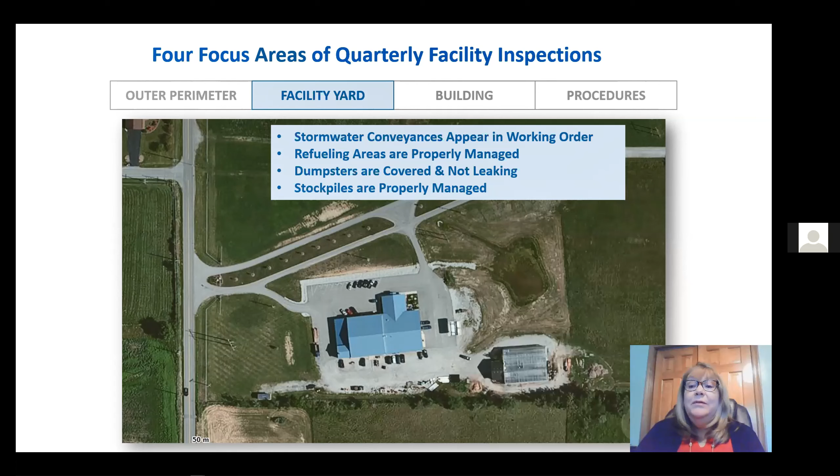The facility yard itself: your stormwater conveyance should be identified on a map, and you should know it. We recommend marking, labeling, or signage - what's a stormwater inlet versus a sanitary inlet? If it's a refueling area, for example, check dumpsters and roll-off containers - are they covered, not leaking? Do you have stockpiles in your yard? These are just some examples of what could be out there, and it could change depending on your operations.

For the building itself, when we're inside, we check any building drain best management practices, vehicle maintenance BMPs, liquid storage, dry material storage, and things associated with your processes. These are just some examples.

And then with the procedures: is your SWPPP updated and readily available, as well as your visual inspection forms done quarterly? What about your MSDS or SDS sheets - are they available? Any type of maintenance documents or records? Say you have an oil water separator or some other BMP that receives regular maintenance, whether you do it in-house or hire an outside contractor, make sure you keep maintenance records, because it's not enough to just say we had that maintained.

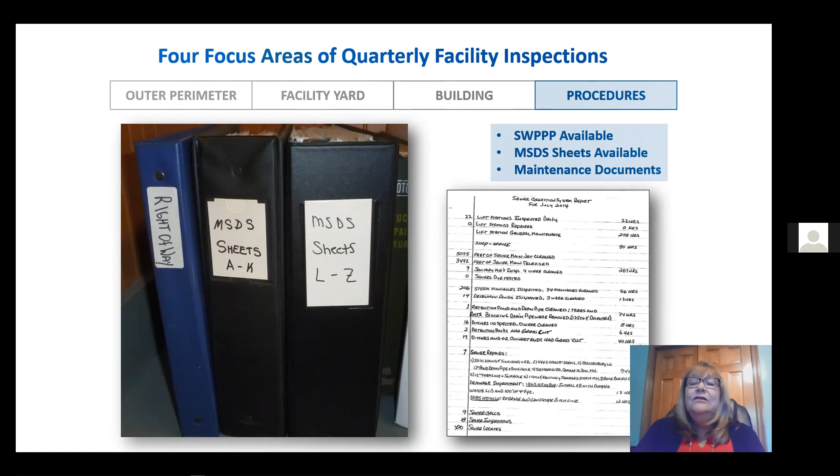You need to prove when it was last done.

Randy also mentioned an unauthorized release or discharge. Unauthorized release is more of a temporary, short-term, episodic type of event. Could be a spill, a leak. You need to be prepared for those. Could be an illegal dumping of some type, like washout waters, for example.

Unauthorized discharges tend to be more long-term, chronic type things. So maybe you have an inadvertent cross connection with sanitary sewer.

I went to a facility one time that made copper wire. Couldn't figure out why they were getting high hits of copper in their stormwater sampling. They found out they had an employee hand washing sink actually connected to the separate storm drain, which of course is a big no-no. Maybe you just have a high groundwater table in the area, so you can get interference with that sometimes. So it's important to figure out what's causing those particular discharges.

The bottom line is keeping those pollutants on your site and out of water features, because as I mentioned, your NPDES permit is issued to the perimeter of your site. So when it leaves your boundary, that's when it's problematic.

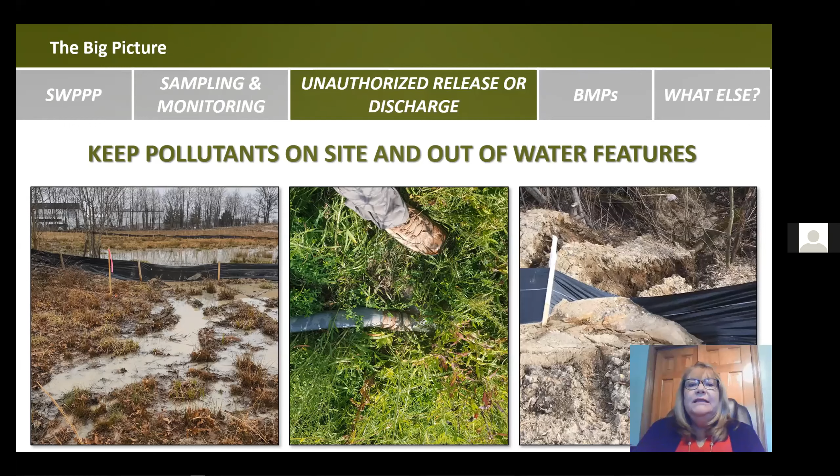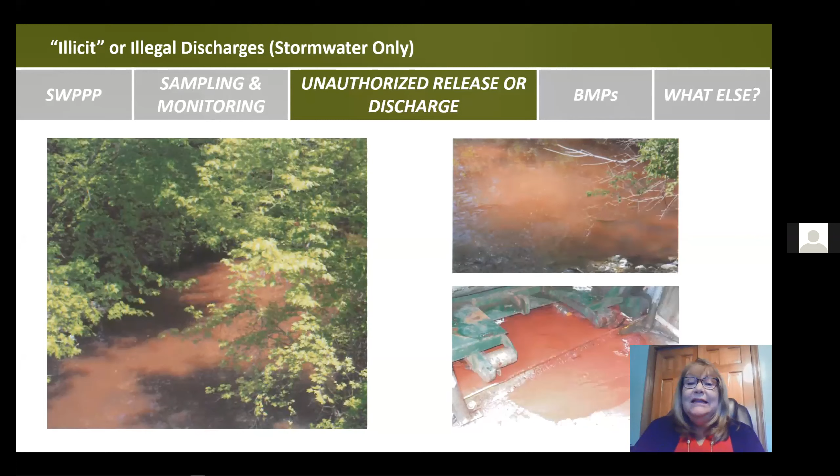And what do you know, it caused a big unauthorized release at that particular time.

Best management practices, BMPs. Randy mentioned your control measures or your BMPs are not properly operated, maintained, or installed based on sampling that you would have.

So there are different types of best management practices. There are non-structural BMPs that you should have - these would be policies, procedures, plans, training, communication - and then also structural BMPs. These could be filters in your storm inlets, berms to help manage the runoff and keep it on site, secondary containment structures, spill kits, for example.

There's always, I mentioned, the great BMP misnomer. So these are called best management practices, and I think there's a presumption there that, oh, I choose this practice, this is the best thing for my site. Well, no, you have to remember a lot of BMPs are based on best professional judgment, and we don't know a lot of times if they're going to work until they're actually on site at your facility and you try them out. So a lot of this is trial and error. This is why we say you need to go back, inspect, and monitor and check to see if those BMPs are working, because there's a bunch of different types out there and you could always use something else.

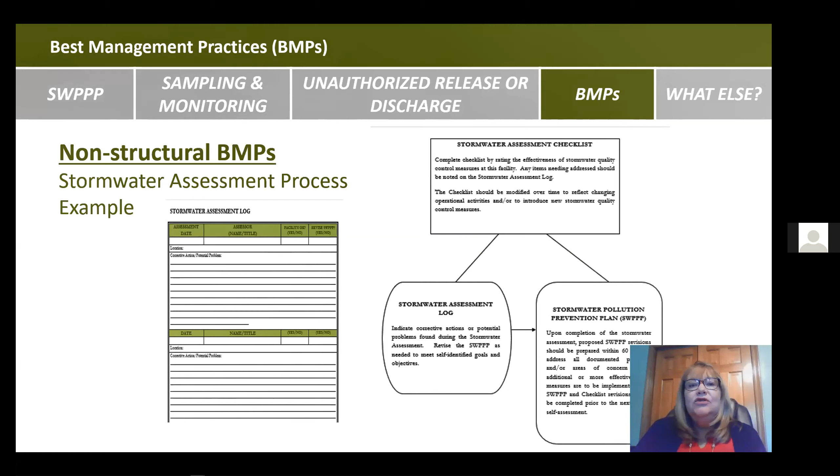Here's an example of non-structural BMPs. So the process I chose to highlight here is your stormwater assessment process example. You've got your visual checklist that you do quarterly, so that needs to be tied in. You could use a log to say, okay, here's how often I did my visual monitorings and what I found. And the most important thing is, based on my findings and any corrective actions that I have, do I now need to revise my SWPPP? Does that cause a trigger? So somehow you need to connect those visual inspections with revising your SWPPP, and this is just one way to do it. Here's another example of a non-structural BMP, an organizational chart.

Who does what related to permit compliance and implementation? There's all the things that you have to do to implement a Rule 6 permit, and then who's going to do it. These are great communication documents to have, especially in the case of an audit. If you have to produce this information quickly, this gives the inspector a very quick visual orientation as to what is going on at your facility, and it produces a really good impression of your facility because it shows that we are organized on our permit. We have very thoughtfully thought about how to implement this, and we do implement it on a regular basis.

Here's some examples of structural BMPs. So we go back to our EPA fact sheet on the timber industry, and based on your type of industry, EPA has developed these for each of the sectors identified in their multi-sector general permit, and then it lists different types of BMPs based on the pollutant source. So you're never at a loss to think of, what type of BMP do I need to use at this particular facility? Here's an idea on where to find BMPs.

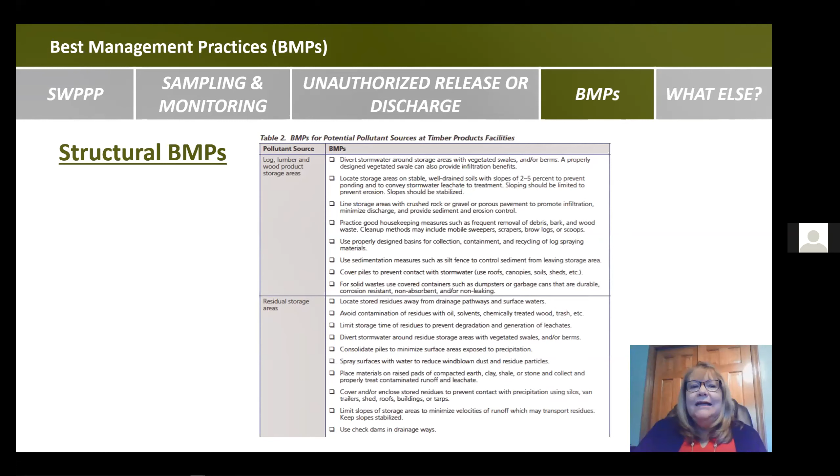Also, the what else - we know that we need an annual report. This is due 365 days from your NOI submittal date or your previous submittal, and IDEM does have a form for this. Don't forget to send in these documents. It's very important to have a good impression overall on your annual report, because sometimes this is the only visual that IDEM has as far as insight into how well you're implementing your program. So you always need to want to provide, and always need to provide, a thoughtful annual report.

Also, there's an annual and ongoing staff training requirement. So we always get the question of who needs to be trained. Well, anybody that's directly involved with implementing your stormwater program, whether it's a full-time employee, a part-time employee, new hires, seasonal, interns - if they're involved with something in some way, shape, or form that could potentially adversely affect the quality of your stormwater discharge, you need to be training those people.

Does everybody need the same level or technical amount of training? Absolutely not. You definitely want to vary your topics based on who those staff are and what they're involved with.

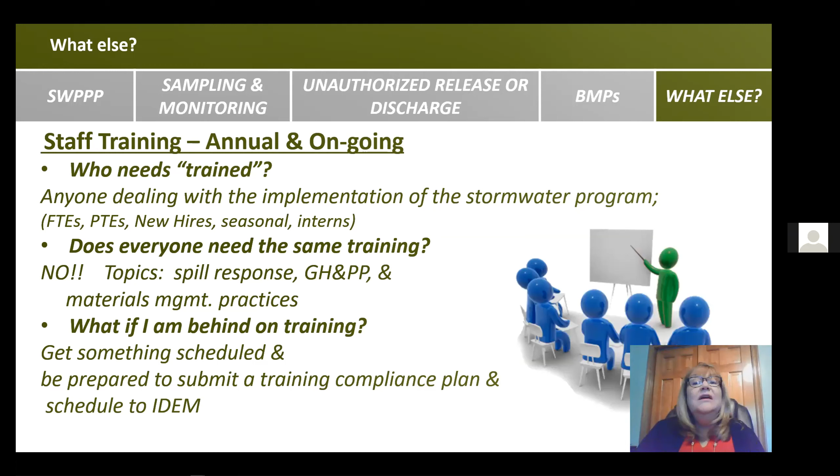We've got EPA - they have a SWPPP guidance document, a sampling guidance document, a no exposure guidance. They have the industrial stormwater fact sheet series I mentioned, and then also there's a Printers National Environmental Assistance Center.

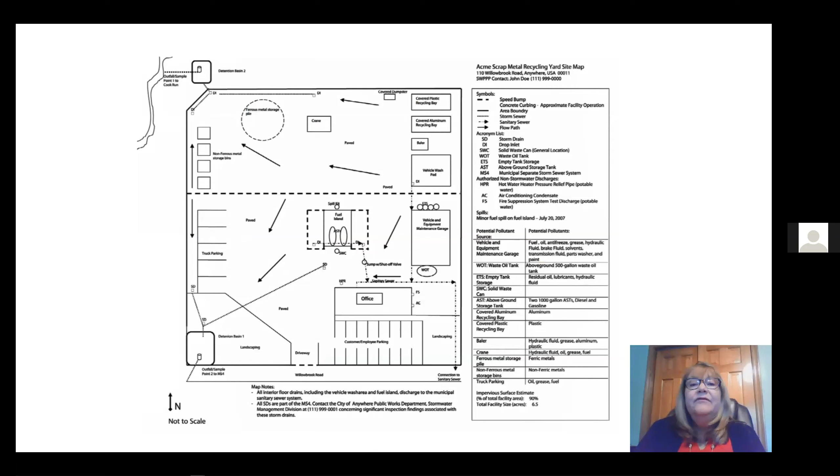So here is the EPA SWPPP guide for operators that you can use. It has good information about developing your SWPPP, including, as we mentioned, showing a lot of information visually. Here's an example diagram with a legend to show you all the different types of things that could go on potentially your visual maps, your diagrams that you have there - a great way to communicate information easily and quickly. There is also an industrial stormwater monitoring and sampling guide that's available.

For people that think they meet a condition of no exposure, there's a guidance manual there that you definitely will want to review and check, as well as EPA's no exposure form, which has some general recommendations or guidelines for whether you qualify for no exposure. But in addition, you definitely want to go through the guidance manual to make sure you meet that condition.

So that's the conclusion of my presentation, and now Randy and I will be glad to take any questions you guys may have. Thank you for your attention.